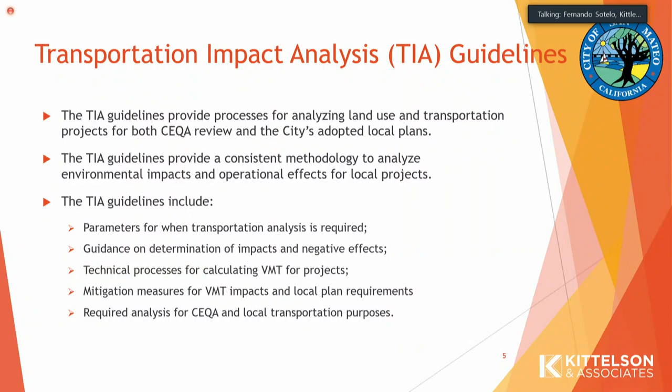Next slide please. So for the CEQA transportation analysis portion, which is based on VMT, it consists of two major topics: one is how we address land use projects, and the other is how we address transportation projects. For the land use project, that will primarily be land development, a lot of times submitted by applicants.

And we developed a couple of procedures to be able to screen out some of the projects from a detailed VMT analysis. That would pretty much streamline some of the processes for small projects and other things, which we're going to go over in the next slides.

For projects that do not screen out, then we would have to conduct the detailed analysis using the city's travel demand model. With that, we have looked at impact thresholds for the city to adopt, and we ended up going with thresholds consistent with OPR's recommendations. The city chose to adopt the county as the appropriate region for comparison, so our thresholds are compared to the county's existing average VMT per employee and per capita.

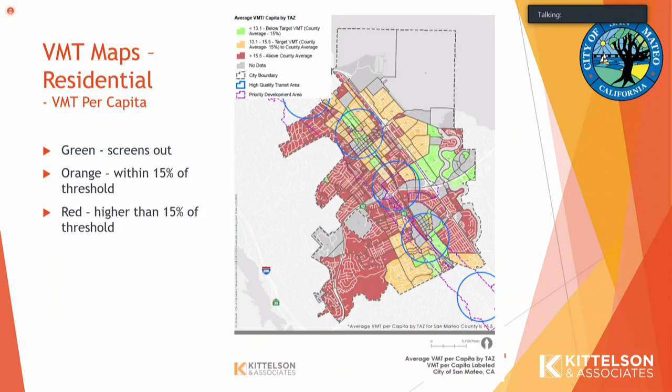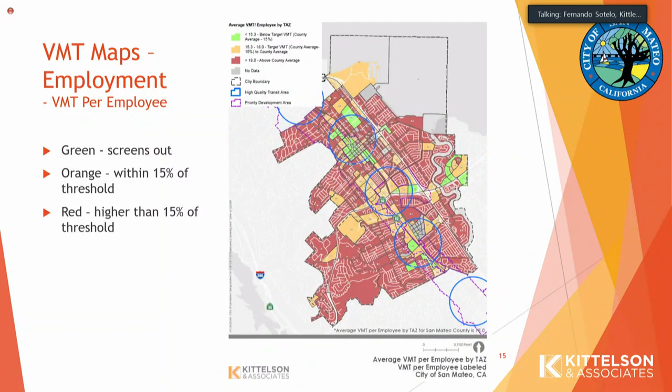But this map is going to assist the applicants and the project team to determine what type of impact may occur. Next slide, please.

Here's where the mitigation is different compared to roadway capacity. We've been using LOS and roadway capacity metrics, and primarily the mitigation has been to widen streets and intersections and other roadway improvements. But now with VMT, the focus is going to be on multimodal transportation and TDM measures. So that's where the focus is changing.

Applicants now would apply transportation demand measures for trip reduction. There's a set of tools we're currently developing for the city, looking at options implemented by the City of San Jose and the San Diego Association of Governments. There are many TDM options to consider, such as transit incentives, transit passes for employees, bicycle infrastructure, shared mobility, parking management—anything that would encourage people to use modes other than single occupancy auto.

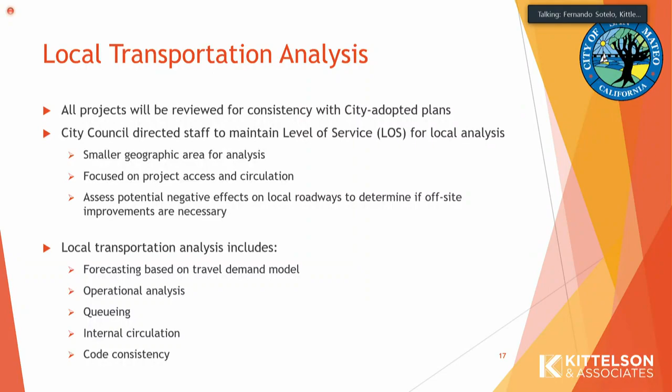That's where I take over again. Thanks, Fernando. As part of this item, we're also introducing proposed amendments to the general plan circulation element related to the introduction of the new TIA guidelines. Our current general plan circulation element is based on level of service. For example, there are two policies noted here that identify the thresholds for LOS that projects are expected to maintain, and then requirement for funding offsite improvements if there's a determination of significant impact under CEQA.

Now that CEQA is based on VMT, that means the city's ability to require those offsite improvements is limited, because findings of significant impacts using LOS is no longer possible. Significant impact is a very CEQA term. So we needed to recommend amendments to the circulation element in order to sever the tie between CEQA and LOS, and to allow the local transportation analysis to be conducted in a way that's consistent with City Council direction, and also in a way to require those offsite improvements that are necessary beyond the identified environmental impacts.

So that allows us to do the local transportation analysis and determine through that if there are negative effects on the local circulation network, and then require those offsite improvements if there are those negative effects. The proposed amendments, contained as an attachment to the staff report, outline all of the modifications that would be required to the circulation element in order to make those analyses feasible.

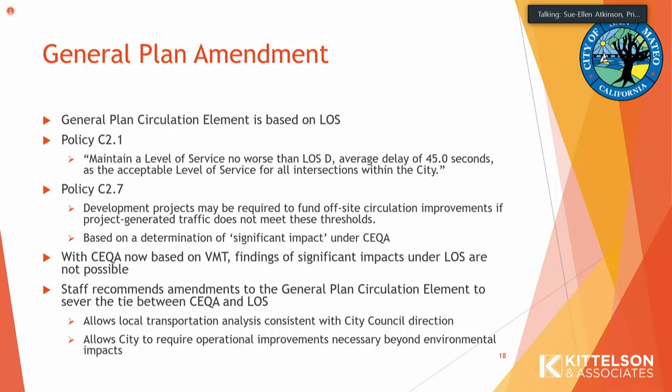So in terms of timeline, we were before you in February. Since that time, we've been doing all the research and work on developing the thresholds and screening criteria. We're here in June before you for the public hearing. After this, we plan to have a City Council study session on the same items in July, and then we're anticipating going to City Council for adoption in August of 2020.

So in closing, the staff recommendation for this item is to adopt a resolution recommending City Council adoption of the general plan amendments to the circulation element, and to make a motion to recommend City Council adoption of the proposed Transportation Impact Analysis, or TIA, guidelines. With that, Fernando, Damien, and I, and the rest of the team, are available for any questions that you might have.

Okay, thank you, Sue-Ellen and Mr. Sotelo. That was a very thorough presentation. Do any of my fellow commissioners have any questions for the staff on this presentation?

I have one question, for the chair. Understanding that we took the recommendations from the Office of Planning and Research, from the Governor's Office, on the concept of affordable housing being one of the criteria for further VMT, what was the City Council's recommendation on why we moved from it being a half mile from transit to being any place or any location throughout the city?

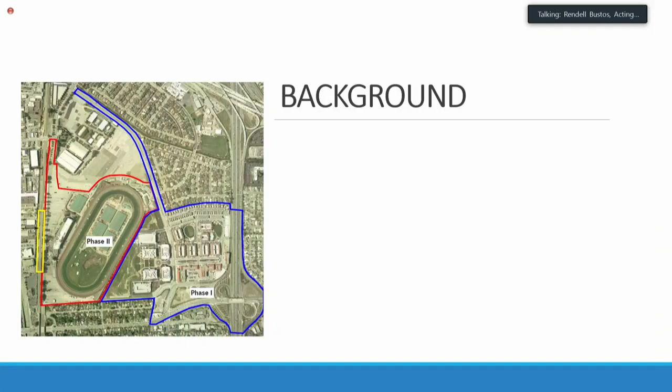I thought it'd be beneficial to start with a brief overview of Bay Meadows, since this is the first Bay Meadows item for a few of our commissioners. Bay Meadows is a two-phase redevelopment of what was once a prominent horse racetrack facility, turned into a mixed-use transit-oriented development. Bay Meadows Phase 1, outlined in blue in the graphic to the left, was approved in 1997 and is almost at full build-out, except for one vacant site at Franklin Templeton's office campus.

It consists of an office campus, apartments, single-family homes, an anchor grocery tenant (Whole Foods), a gym, open parks, and several more mixed uses. The second phase, Bay Meadows Phase 2, outlined in red, was approved in 2005, along with the development agreement, EIR, and entitlements on a block-by-block basis.

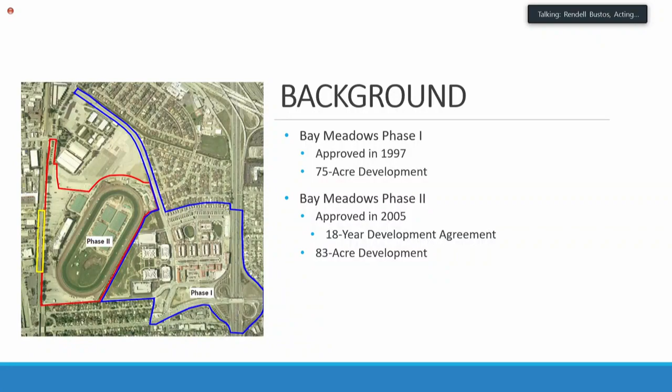Phase 2 is just west of Phase 1 and was conceived at the same time as the Rail Corridor Plan, both of which focus on locating higher density housing and office uses closer to the Caltrain station. The closest station is the Hillsdale Caltrain station, and its relocation is shown in yellow, adjacent to Phase 2 along its western side.

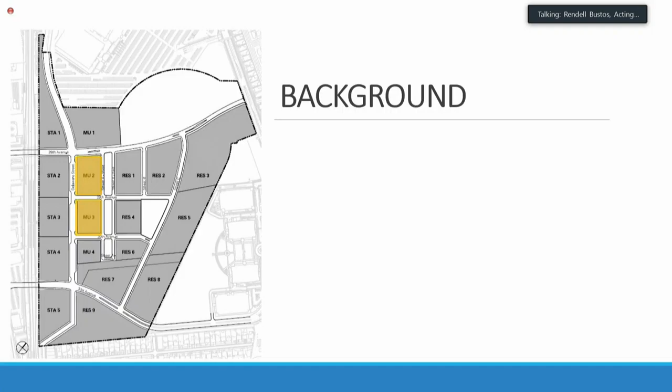This particular application focuses on the mixed-use blocks MU2 and MU3, highlighted in orange. With the approval of the phase 2 area, the council had approved this phase 2 specific plan amendment to the Bay Meadows specific plan, which is essentially a standalone document, as well as the design guidelines and development standards.

Within the specific plan amendment are a series of provisions related to land use, density, and overall goals of the phase 2 area. So this particular chart at the bottom of the screen shows the limits of commercial or office, residential, and retail land uses in the phase 2 area.

So under the base program, Wilson-Meany can develop a maximum of 1.25 million square feet of commercial or office, 1,250 residential units, and 150,000 square feet of retail.

They can flex a little bit based on market conditions, by increasing commercial and reducing the residential maximum, or vice versa. Regardless of the opted maximum, the specific plan amendment requires a minimum of 500,000 square feet of commercial and a minimum of 1,000 residential units.

Following the staff presentation, Wilson-Meany will go into where they stand currently.

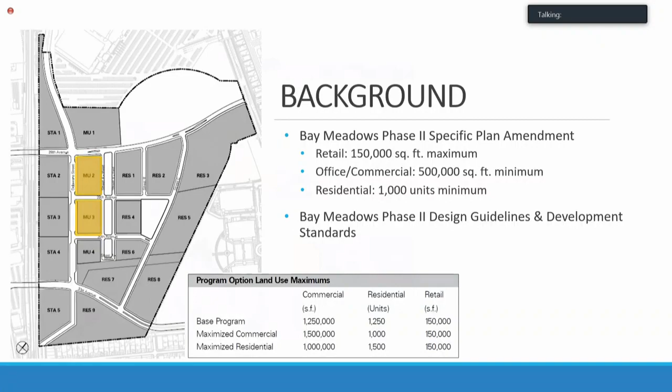So looking closer into the subject project sites, MU2 and MU3, shown in orange, are adjacent to each other, bound by South Delaware Street, Landing Avenue, West Kyne Street, East 28th Avenue, and Derby Avenue, dividing the two blocks. They're both zoned BMSP, which stands for the Bay Meadows Specific Plan, and have a general plan land use designation of TOD, Transit Oriented Development.

MU2 and MU3 are approximately 1.75 acres and 1.51 acres in size respectively. MU2 and MU3 are the final remaining vacant mixed-use blocks, situated between MU1, which is the site of the Bridge Affordable Housing Development currently under construction, and to the south, MU4, which is completed.

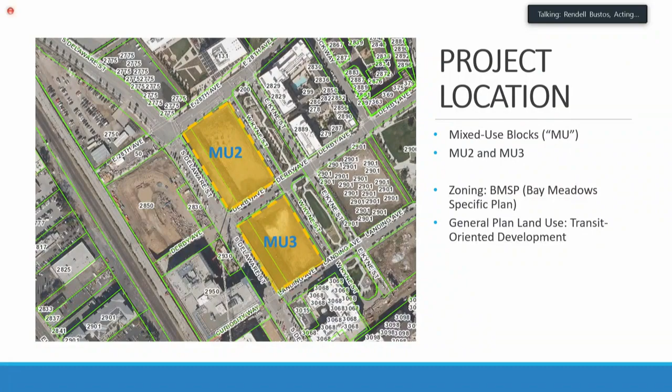So shortly after the adoption of the phase 2 specific plan amendment, Wilson-Meany received approval of all blocks in April of 2008. Due to changing architectural interests, programmatic needs, and economics, Wilson-Meany has for some blocks requested a modification of the 2008 designs on a block by block basis.

Most recently, the Planning Commission reviewed and approved the modification to the Station 1 and Station 5 blocks in 2018. And in some cases, Wilson-Meany did build the 2008 designs. But again, when needs change, they sought modifications to those 2008 designs.

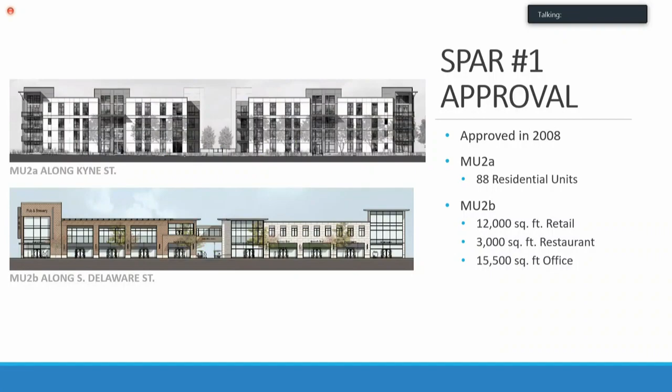So this particular slide shows the original MU2 design, with MU2A being the residential portion at the top and MU2B being the commercial portion at the bottom.

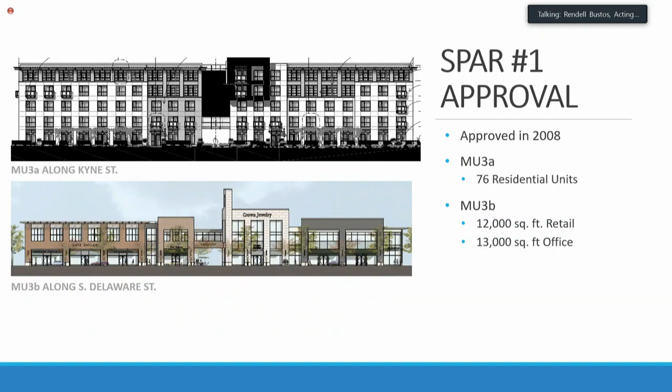And this slide shows the MU3 design approved in 2008. Similarly, MU3A at the top is the residential portion, and MU3B at the bottom is the commercial portion along South Delaware Street.

So under this particular modification, the applicant is requesting generally to increase the office square footage and to reduce the number of previously approved residential units. At MU2, the applicant is requesting a total of approximately 184,000 square feet of office uses,

7,500 square feet of retail, as well as an area with potential for a childcare facility. At MU3 to the right, the applicant is requesting 121,000 square feet of office uses and 5,100 square feet of retail.

In terms of the residential components for each, the applicant is requesting to remove the 88 residential units from MU2 that were previously approved, and to reduce the units in MU3 from 76 to 57.

Staff anticipates that the applicant will still be under the max land uses for office and retail limits, and still exceed the minimum 1,000 residential units total in the phase 2 area. Again, following staff's presentation, the applicant will provide greater detail behind the exterior design and site planning.

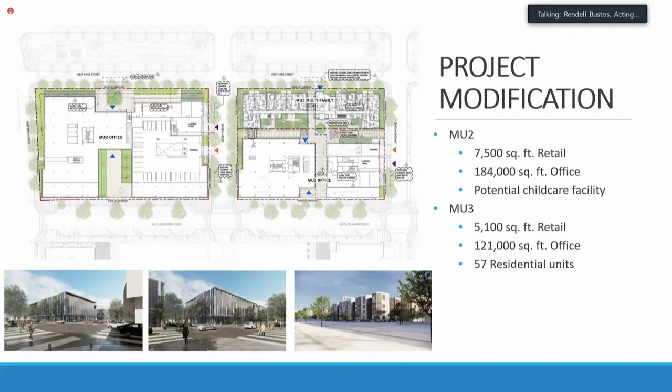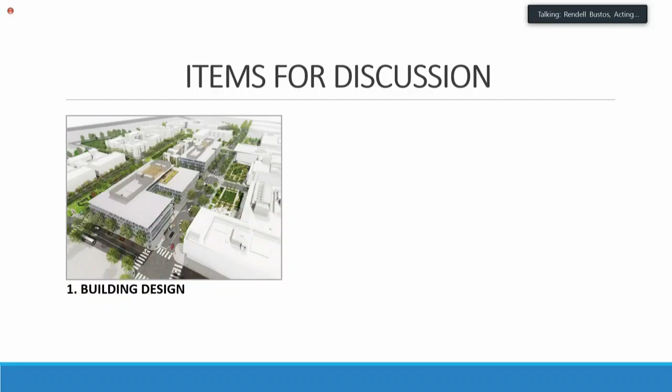So this evening, staff is requesting that the Planning Commission provide feedback to staff on two main items, both of which are design focused. The first discussion item is on the building design as a whole, in particular its massing, material selection, and compatibility in the phase 2 area.

So a bit on the proposed building materials. Generally, the architectural style is contemporary, probably much more contemporary than what we saw in the 2008 design. This design utilizes glass curtain walls, metal paneling, as well as concrete and wood-like paneling closer to the ground level.

Considering the building designs, the commission should also consider the fact that at build out, the designs were more contemporary generally than the design guidelines had originally conceived, which were a little more traditional. You could probably attribute that to the fact that building designs are informed by their context, and given the identity now of phase 2, the context had become more contemporary than originally imagined in 2008 possibly.

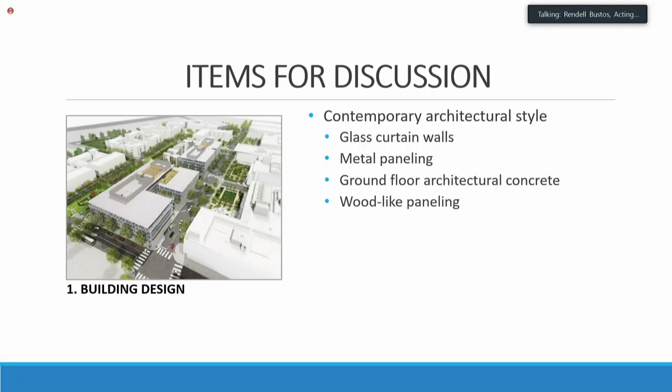So the second discussion point for the Planning Commission is on the applicant's list of requested exceptions to the phase 2 design guidelines. As mentioned previously, the council adopted the phase 2 guidelines and development standards to provide a set of standards for physical development of the various blocks. The guidelines mention that the design for each station is not required to comply with all provisions. Rather, the applicant can request exceptions and provide justifications for them, and it's on the applicant to demonstrate how the design is consistent with the guidelines and specific plan overall, even with those exceptions. Historically, all phase 2 blocks were approved with some exceptions to the guidelines, based on the fact that the guidelines were shaped prior to even knowing what the physical buildings would look like and how they'd be laid out.

The staff report included attachment 7, which is the list of exceptions in greater detail, generally relating to building location, massing, and setbacks. Staff also included attachment 6 to provide the commission with the list of design exceptions approved for the 2008 designs.

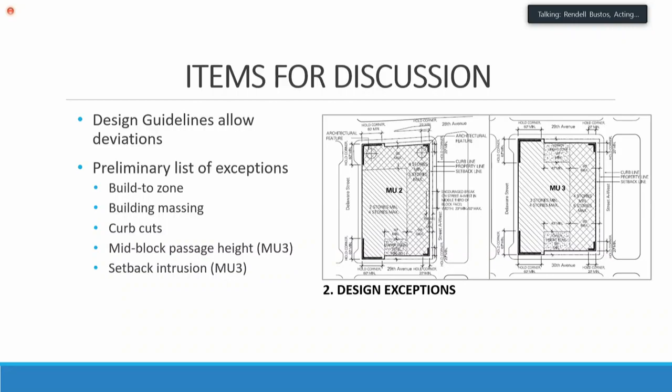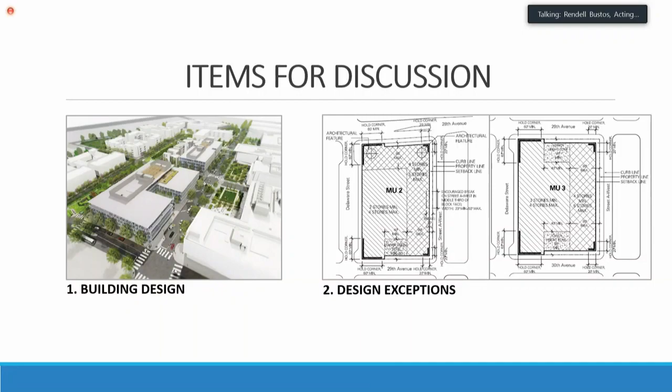So again, to recap briefly, staff is requesting feedback on the building design as a whole, as well as whether the design exceptions result in an overall improvement of the design.

Lastly, on the next steps, because this item is pre-application, the applicant will have the opportunity to revise the design based on feedback from the commission and the public prior to filing their SPAR modification. Staff will review that modification and conduct environmental review prior to a public hearing by the Planning Commission for action on the application.

This concludes staff's presentation. I, as well as Lisa Costa-Sanders, who's co-planner on the project, are available for questions. We also have city staff and public works for questions, and the applicant, Wilson Meany, and their design team will also be providing presentations. Thank you.

Okay, excellent. Thank you. Can we go ahead and have the applicant presentation, and then we'll go to the commissioner questions.

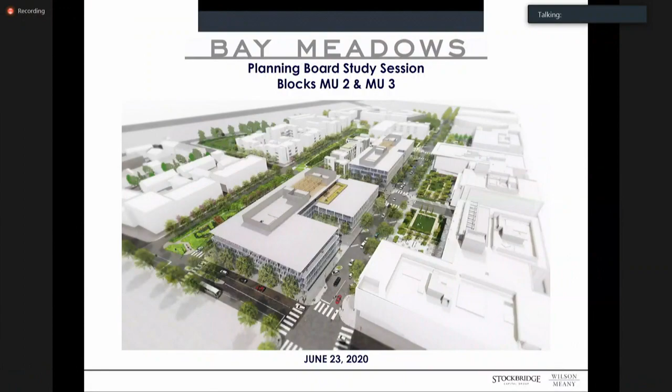Good evening, commissioners. My name is Janice Thatcher. I'm with Wilson Meany, developers of Bay Meadows. We're here tonight to propose a SPAR modification for mixed-use blocks 2 and 3, as Rendell said.

To give you a brief overview of Bay Meadows today, the project is approximately 2/3 complete. We have 777 homes with 1,800 residents, 3 office buildings which are fully leased to high-quality tenants, and retail stores including Fieldworks Brewery, Roam, Blue Bottle, Lift Fitness, and Tin Pot Creamery.

The transit-oriented development is working. According to our surveys, over 40% of the residents commute via Caltrain. The Station 4 garage is roughly 2/3 full, as over half of the SurveyMonkey employees and their subtenants take alternative modes of transportation. The project is compliant with traffic requirements, including the Traffic and Parking Management Plan, as well as the TMA's annual parking study. We currently have several buildings under construction or about to start, including over 200 homes and 2 office buildings at stations 1 and 5.

The proposed SPAR for MU2 and 3 is consistent with all project approvals, including the development agreement, specific plan amendment, design guidelines, and traffic controls. As a reminder, pursuant to the development agreement, Bay Meadows has made significant contributions to the city, including 15 acres of public parks, land for the bridge housing development, and over $12 million in impact fees. The SPAR process is required to ensure consistency with the design guidelines and development controls.

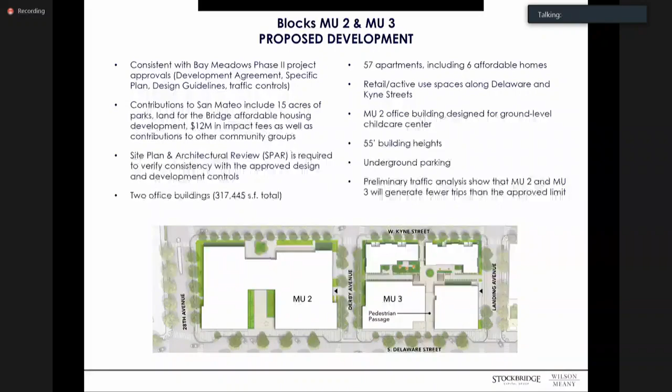We have completed a preliminary traffic analysis, which indicates that the project is consistent with the trip budgets established for the project. In summary, at completion with the proposed SPAR amendment, we would have 1,038 homes, within the limit of 1,000 to 1,500 approved for phase 2. And we would have 1.2 million square feet of office space, again within the range of 1 million to 1.5 million approved previously.

I would now like to introduce Nicole Emmons of Hart-Howerton, who is going to provide some additional context. Thank you, Janice, and thank you to the chair and the commissioners. As Janice noted, I'm Nicole Emmons, a principal at Hart-Howerton, along with my colleague Paul Milana, who you will be hearing from shortly. We've been working with the city, with Wilson Meany, and a team of architects and landscape architects at Bay Meadows since 2000, on the specific plan amendment, design guidelines, architectural design, as well as working with the city as it's been built out over time.

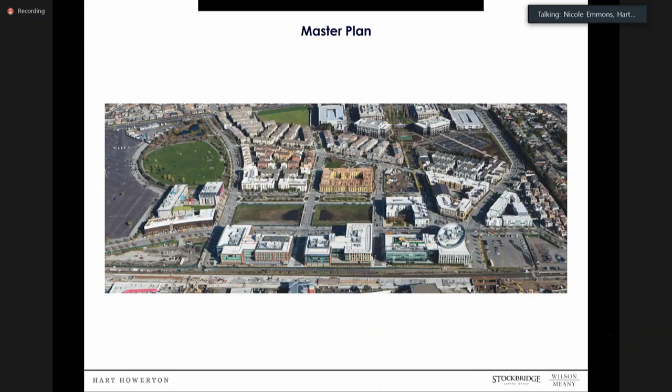The Bay Meadows Master Plan is designed to integrate a transit-oriented development into the fabric of San Mateo, providing open space and 15 acres of parks to serve the community, and sets forth a vision to create a community setting that would first and foremost consider the public, the pedestrian, provide for the needs of the community with a mix of uses within a walkable neighborhood, clustered development with higher density uses conveniently accessible to transit, and create alternate ways to move through and experience the community, be it on bike or on foot.

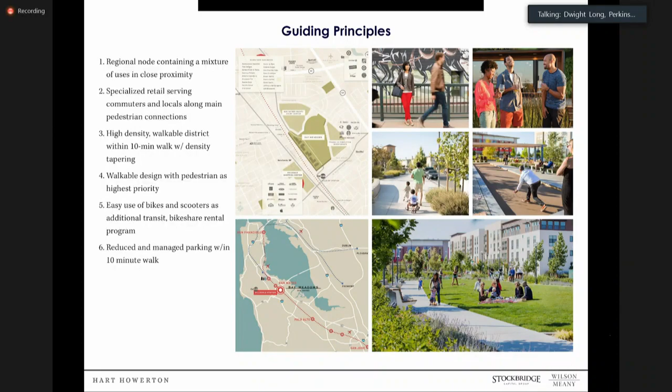There are a number of approvals in place that set the design standards and guidelines to ensure the development meets the objectives of the specific plan. These are the criteria for evaluation of designs that conform to a commonly held vision and set of expectations, with particular attention to those aspects of design seen and experienced by the public. We commonly refer to that as the public realm.

Components of these guidelines, such as those noted here, direct and instruct the developer, designers, and architects with regard to how a building should be designed within the context of a larger community, so that all buildings recognize and contribute to a larger pattern and a sense of place, becoming part of the daily life as the backdrop for where life happens at Bay Meadows.

Dwight Long from Perkins & Will will now walk through the design of the office components.

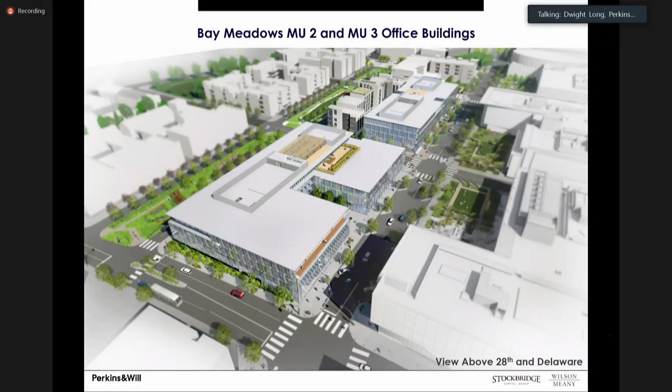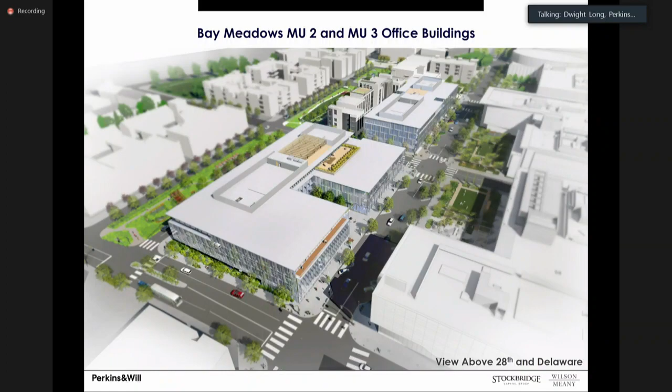This is an aerial view looking southeast from the prominent corner of Delaware and 28th. You can see both the MU2 and MU3 properties in relationship to the station blocks across the street.

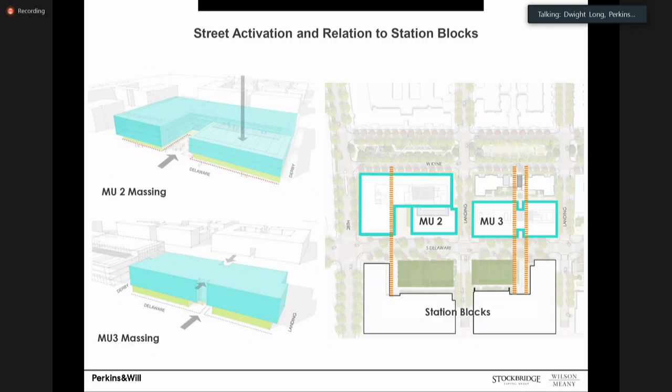The left-hand images show the building's massing organization. Both buildings consistently use a base, middle, and top composition, where the base and top are generally set back to help break down the overall scale of the building. The continuous setback ground level street activation is highlighted in yellow.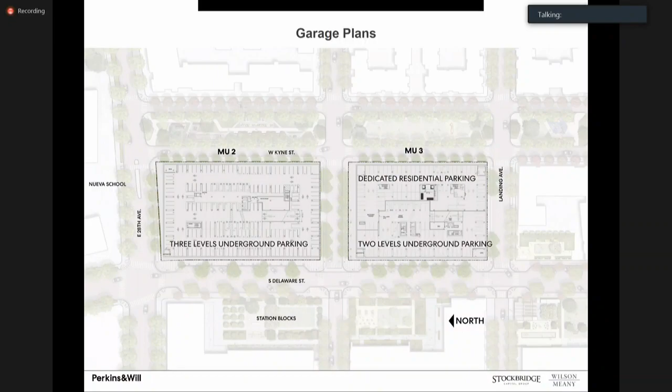I'm going to now show some exterior views of the building to describe the architectural approach for the office buildings. We start with a view looking from the prominent corner of Delaware and 28th Avenue. In general, the buildings share a similar massing, material, and facade patterning approach.

We've used a lighter, more transparent material vocabulary in contrast to the more solid station blocks to serve as a bridge between the station blocks and the residential neighborhood to the east.

In terms of massing, as I said before, the top and base of the buildings generally set back to reduce the perceived mass of the building, shown here at the ground floor retail active use on the street and the 4th floor terrace to provide social spaces along Delaware.

The facades range from a clean glass facade here at the corner of Delaware to an introduction of refined vertical metal panel accents that provide a rhythm to the facade as one moves around the building. This is shown here on 28th, where the panels help to break down the scale of the facade as one moves towards the park.

Lastly, the building forms are consistently framed and highlighted by broad roof eaves clad in natural wood to create a soft, warm surround of the glazed facades.

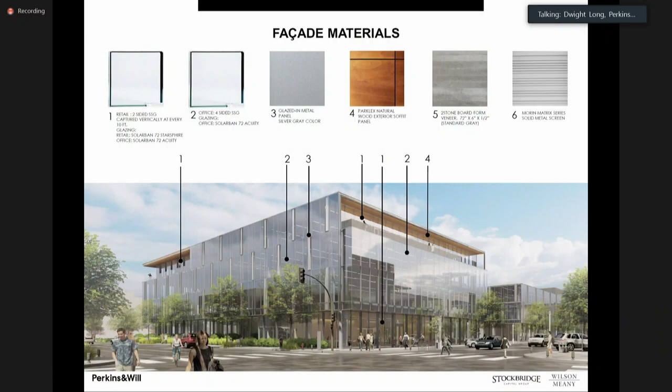When we set out to design the residential building, our inspiration came from the iconic row houses that are ubiquitous across the Bay Area, often featuring a prominent projecting bay window with their vertical rhythms that create so many cherished streetscapes throughout the region.

As Dwight mentioned, there are 68 parking spaces located below grade. Access is shared with the office building along Landing Avenue to minimize curb cuts, but the residential parking is gated. Direct access to the residential floors is provided via elevators and stairs, and there is additional bike parking and a pet washing station located at this level.

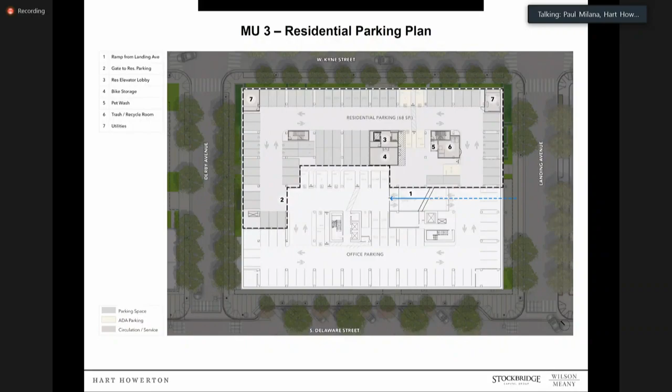In the lobby entry, the bay window composition and roof shade structure at the center of the building form an architectural feature marking the entrance to the mid-block passage.

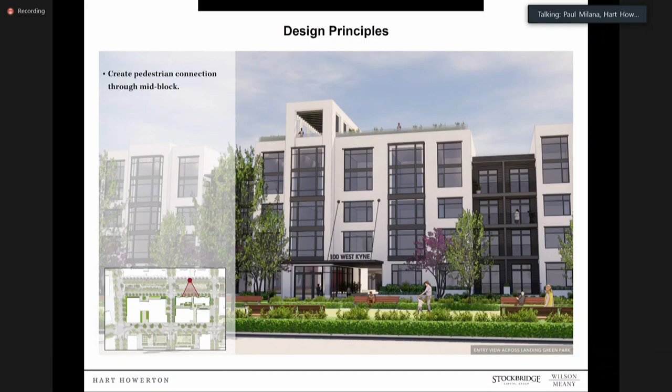Looking at some of the design features of the building, we see the mid-block passage shaded by a broad overhanging canopy with the building identification overhead, as well as the composition of the lobby glazing, the bay windows, and the shade structure at the roof as an architectural feature.

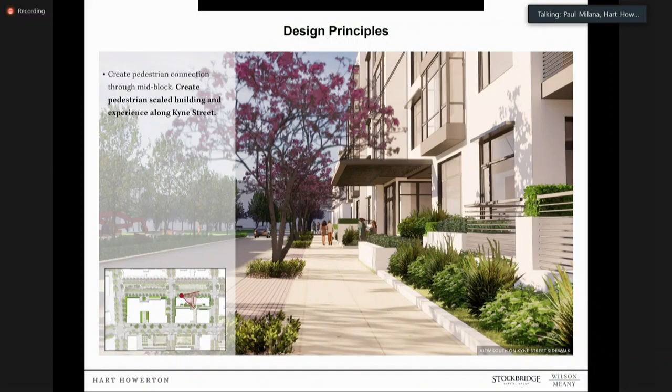Along Kyne Street, the broad canopy clearly marks the entrance to the building in the mid-block passage, and the layered landscape terraces and projecting bay windows help to give human scale to the building at street level.

There are many housing options at Bay Meadows today. With this building, a new type of residential unit will be offered. The 4th floor units have additional ceiling height with loft space, some as sleeping lofts and others as bonus rooms.

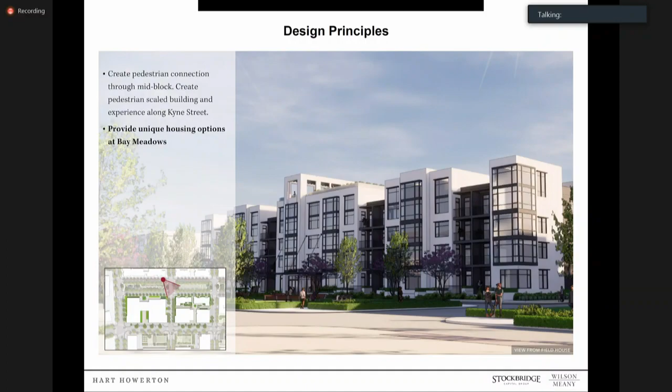This view shows how the architecture of the residential building evokes a time-honored housing type in the Bay Area, while clearly being a contemporary building that complements the range of architectural expressions currently existing at Bay Meadows and along Landing Green Park.

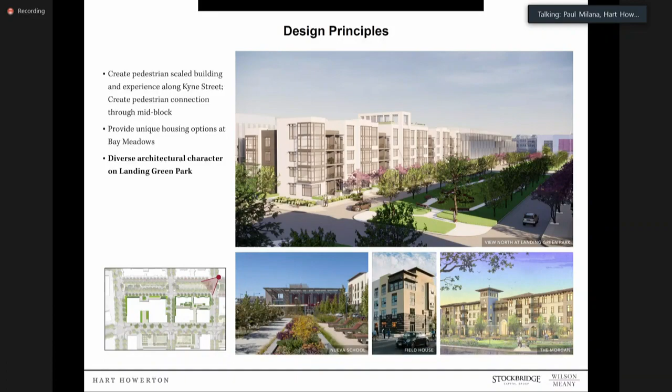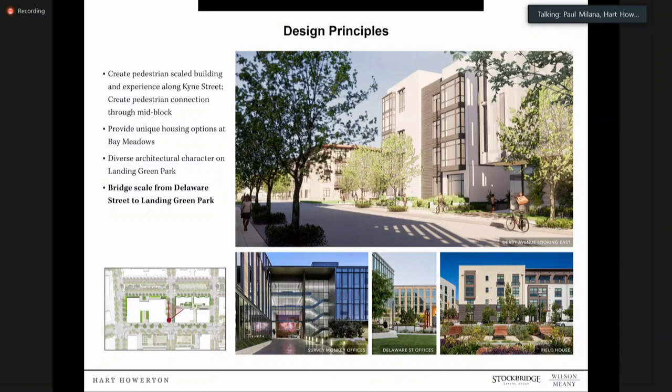This view along Derby Avenue illustrates how the building bridges the scale of the office buildings along Delaware with a break for the north-south walkway, and then the massing builds up again to Landing Green with the use of the loft unit.

As for the exterior materials, the primary wall material is an off-white stucco. It is accented with dark gray lap siding at the terraces. Window frames are dark with clear glass. There are a range of dark gray metal elements for the terrace structure, a gray stained porch ceiling, and glass handrail at the roof deck to maximize views.

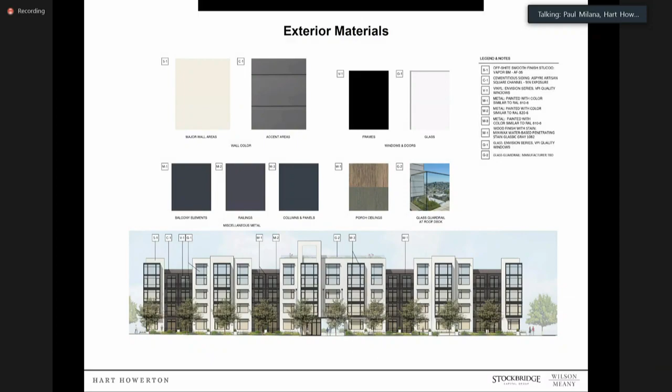Now I'd like to introduce Nico Wright with CMG Landscape Architecture. Thank you, Paul. Good evening, commissioners. My name is Nico Wright with CMG Landscape Architecture. CMG has been involved with the planning, design, and construction of the Bay Meadows community from the beginning of its development.

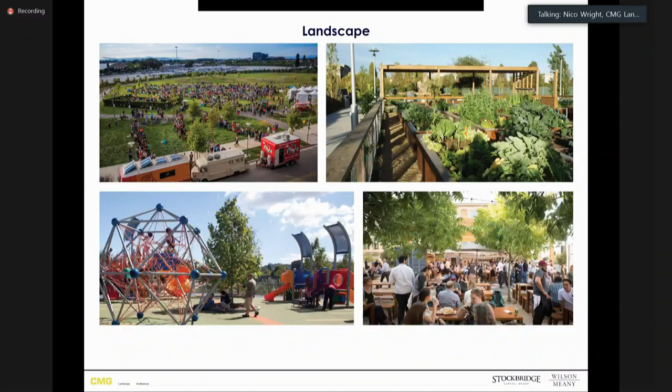When we embarked on the planning for Bay Meadows, we conceived of the streets and open spaces as a continuous network of parks that would be a great place to walk, bike, stroll, and gather in. That has led us to the creation of a variety of public spaces, from beautiful pedestrian paths and sidewalks to the community garden, playground, large park, and beer garden you see here.

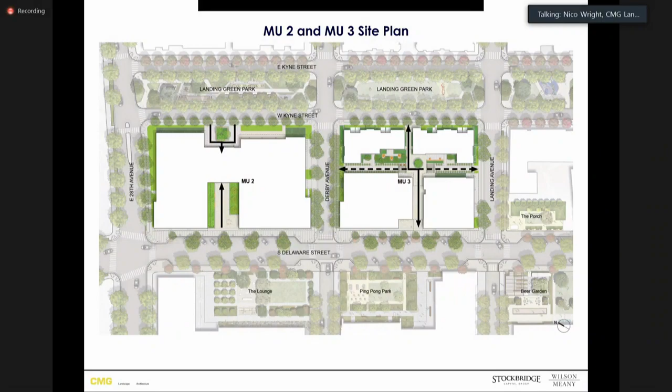At the MU2 and 3 sites, we are integrating the office and residential buildings into the sidewalks, connecting the buildings to the walkable landscapes that connect the neighborhood. Generous entry plazas lead into the office building in MU2, and pedestrian passageways with rich planting connect the MU3 block to the sidewalks and park around it.

Our approach to the planting is to continue the principles of embedding ecology, habitat, and water conservation throughout the landscape of the neighborhood, and provide delight for people through rich garden spaces full of flowering trees to textured planting. The planting palette is selected for its drought tolerance, low maintenance, and benefit to ecological and habitat value.

At the MU2 office building, a social plaza, shown on the left, invites people into the building off of Delaware Street and offers a place to pause and people watch out onto the activities on the social street under the shade of a stand of sweet gum trees.

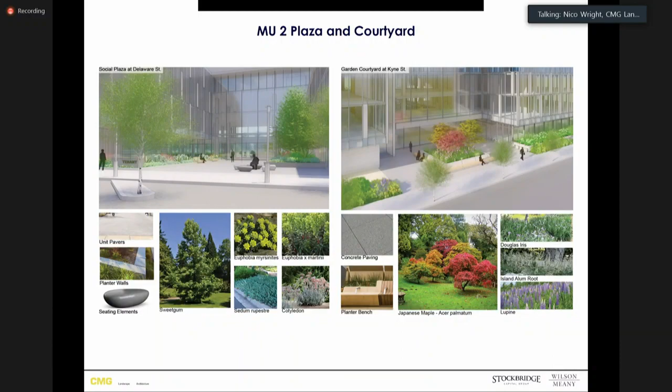On the right shows the garden courtyard along Kyne Street that provides a place of respite with bike parking adjacent to the building lobby. The garden courtyard will be a wonderful place for office workers to take their lunch around a grove of maple trees.

At the MU3 office and residential building, the pedestrian passage will lead through the buildings, connecting it to amenities on Delaware Street and Landing Green Park on Kyne Street. Residents entering from Kyne will be able to pass straight through the passageway with their bicycles to access the secure bike parking off of the courtyard.

Where the pathways join, there's a garden of flowering trees, shade trellises, and bicycle parking as shown on the left. There are small social spaces for meeting within this courtyard around a flowering dogwood tree. We are thrilled to bring these buildings and their landscapes to complete the neighborhood of Bay Meadows.

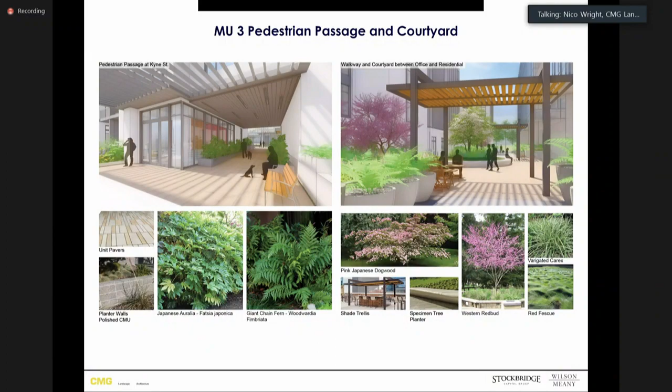Yes, it is. Thank you for your time. Okay, thank you.

Before we go to public comment, we'll go to questions from the commissioners. Who would like to start? Questions for staff or the applicant? I could start. Okay, Commissioner Williams.

Okay, thank you. That was a lot to take in, so hopefully my notes and questions won't be too disjointed. First, there was reference in the staff report or presentation to land put aside associated with the bridge project, and I don't recall what that is or where that is. Could you provide me more information about that?

Sure. The bridge affordable housing site is also known as MU1, which is just north of the MU2 site. If I could pull up a map briefly. Is that the project that's next to Nueva? Yes. For, yeah, going to pull it up. Right, okay, and I think that's in construction right now. Yes. Okay, thanks, that's good to know.

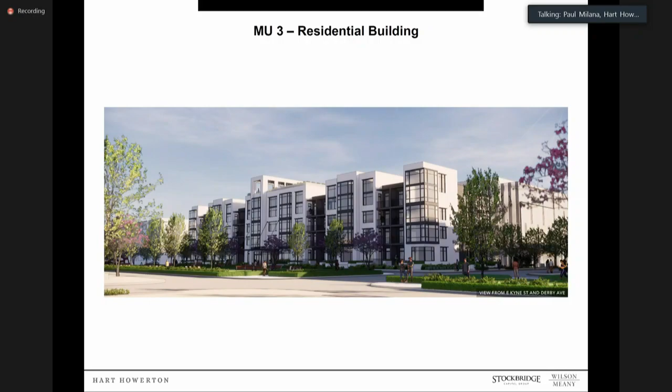Sure, this is Paul Milana with Hart Howerton. We studied many configurations for the massing along Landing Green, and we really liked the ability to link the glazing of the lobby area, the bay window element on the next three floors, and a shade structure on top of that composition to become an architectural feature that marks from some distance the passage and entry to the building. Then to balance that, we added the canopy with the cable support, so that it's an asymmetrical composition, but we think the asymmetry in this case is balanced, if that makes sense.

There was another image of it that showed - yeah, right there. Okay, I just wanted to hear your thoughts on that.

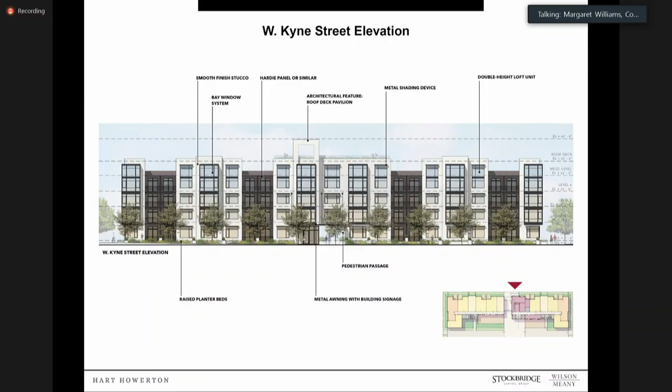Okay, I have one last question for clarification. Looking at the floor plans, the loft spaces or bonus rooms, I was just curious - did those have closets? I couldn't tell from the plans easily. I don't know if it was in this presentation, it was in the packet I got. I don't think it showed here either, but is there any reason why they wouldn't have closets? I believe they have closets, but Nicole, please correct me if I'm wrong. Any of the lofts that are sleeping units, sleeping lofts, have closets. Okay.

I think that's all the questions I have. Let me just double check. Yeah, that's all that I have. Okay, thank you, Commissioner Williams.

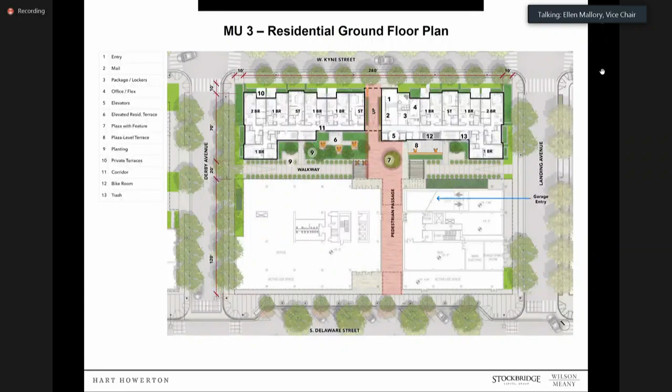Questions, clarifying questions for staff or applicant? Yes, Commissioner Vice Chair Mallory. My question is for Ms. Thatcher - I would like to hear your thought process for making these changes and your reasoning behind it.

One of the underpinnings of the entitlements for Bay Meadows was to provide flexibility for long-term development of these blocks, specifically as either residential or office. Based on the market today and the mixed use nature of the development, we think office is supportive of the other uses, predominantly the public transit and retail that's so important to the community at Bay Meadows. The additional 317,000 square feet of office space brings a lot of workers to the area, which helps support the commercial uses. That's really our thinking behind it.

And when did you start this thought process? It had to have been a while back.

It's been something we've been studying over the last year or so, working with the design team. As you noted on the previous SPAR, we had two separate buildings: a residential building lined on the east side of the block across from the Landing Green Park, and small 2-story buildings on the east side of the street with retail and commercial on the second floor. That was originally designed back in 2008, because prior to the commencement of the grade separations, the project had a much lower trip budget, so we were not able to build out all of the space. On the west side of the street there were also bar buildings. Now, as the grade separations are nearing completion, we have a higher trip budget, and the ability to build a building which fills that whole block and has active retail use on the ground floor, we think is a better design and more supportive of the mixed use development.

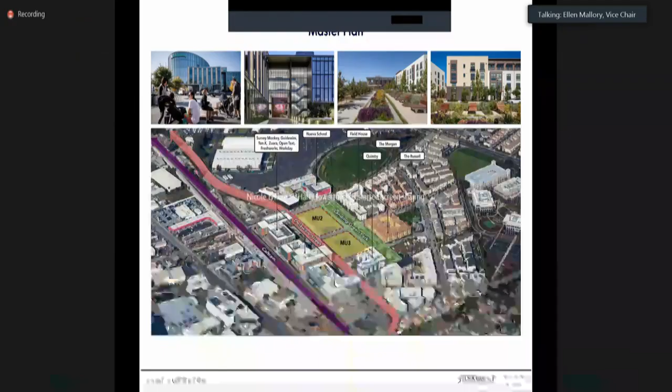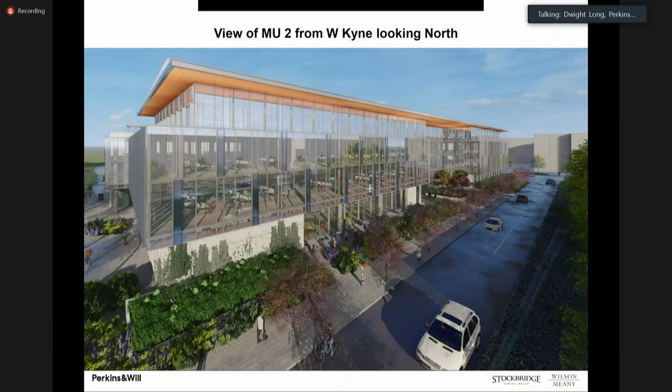What we've tried to do is give that side of the building a much more broken facade, layering this roof overhang to give it a more residential feel. This facade steps back along its entire length, with a large eave hanging over the building. We used more tactile materials on that side, and set the building back from the Kyne Street edge. So there's much more breakdown of the overall facade in terms of how the height is perceived, as well as opening up where the entry on the backside of the lobby would be. In addition, the outdoor play space for the potential childcare is right there, helping create an active use along Kyne Street. So we think it's a much more residential feel on this side of the building than the front, which faces more directly to the street. Does that help?

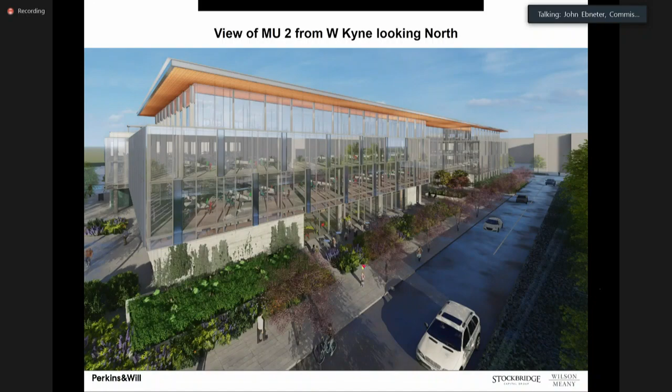Janice - have there been other locations within Bay Meadows Phase 2 where childcare has been proposed as part of the build out? We are super excited about doing childcare at Bay Meadows, and we've been approached in the past by childcare providers. One challenge we've had is that we haven't had a location with the required outdoor space, so that's been our limitation. With this location, we do have the code-required outdoor play space along with the interior space.

Okay, I'll get back to that during the comment period, or maybe some more questions. The residential component was originally, I think, 164 units for sale, and now there are 57 units for rent. What's driven you to such a drastic swing in residential, and why are they now only rental?

As explained previously, we have the ability to pivot between commercial and residential on these mixed-use blocks. In addition, the underlying entitlements don't dictate whether the housing is for sale or for rent. In both cases, these are market-driven decisions. For rent, we now have a number of for-rent buildings at Bay Meadows - we have the Morgan, currently under construction and completed later this fall, and the buildings known as Russell, Quimby, and Fieldhouse, which are rental buildings.

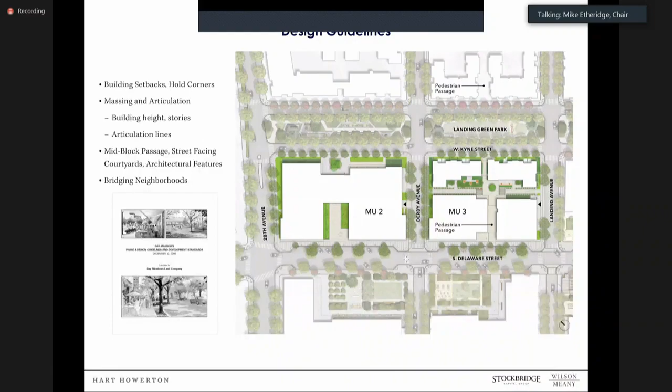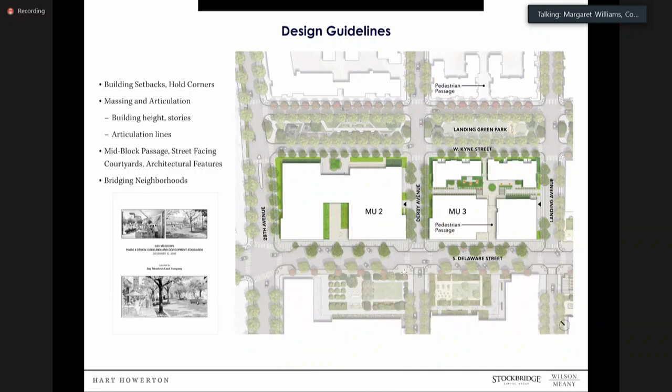The courtyard feels rather deep and not wide - deeper than it is wide. I wonder if that would feel a little more inviting. As I said, I walked down the street today looking at it, and the station buildings on the other side of the street are much wider than they are deep in terms of open space, and they're extremely inviting.

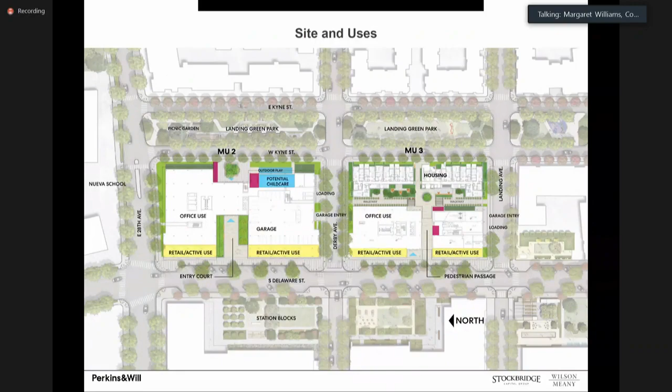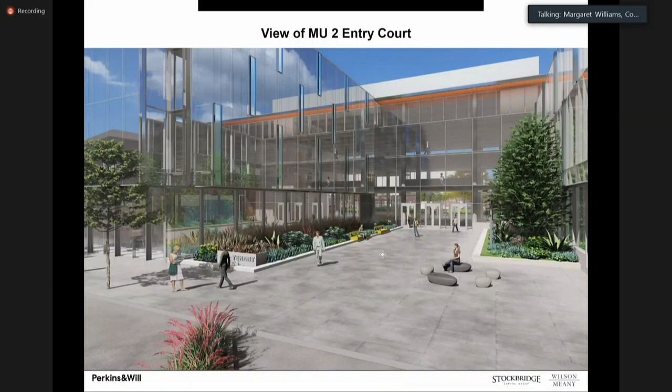The courtyard for MU2, the sort of slot - architecturally it's kind of interesting, but in terms of the pedestrian experience, it feels a little stark, deep and narrow. I know it's not that narrow, but it feels that way compared to what's across the street. So I don't know if there's any way to open that up a bit.

Let's see, I think those were generally my comments with regards to massing and materials. With regards to the design exceptions, I realized there were pages of them, but they were all related to other buildings. So just looking at the items associated with MU2 and MU3, I think they generally make sense and are acceptable with a couple of comments.

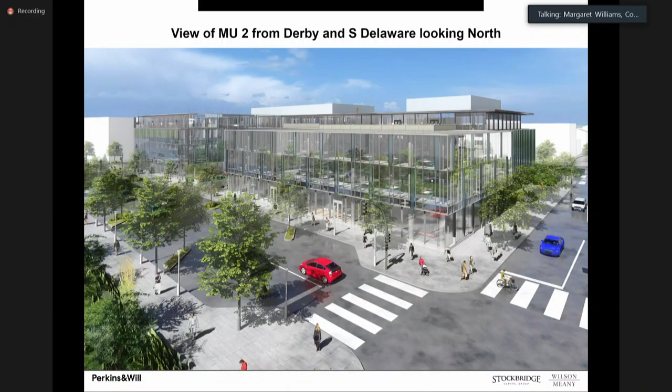28th Avenue is the one that goes by Nueva School, right? So the build-to-zone and holding the corners along there - I feel like it actually makes sense to pull that back a little bit. This creates a pretty urban setting for a high school that hasn't had that feel until these buildings are built. So softening up that elevation a little bit, not just for the residents but the students across the street, might help. So pulling it back a little bit at some portion, not necessarily the build-to-zone.

So the two groups of people across the street from MU2 are a high school that no longer has all the open space it used to have, and residential affordable housing that's also going to be a prominent feature. So I would consider looking at that elevation in a little more detail.

Let's see, otherwise I think most everything else made sense. Oh, I did have a question. The required 3-block pedestrian easement is covered by 2 pedestrian bridges. Do we still have pedestrian bridges on MU3? I guess we do, yes. Okay, I'm just realizing that's because the walkthrough - I guess the building goes over it. So that makes sense.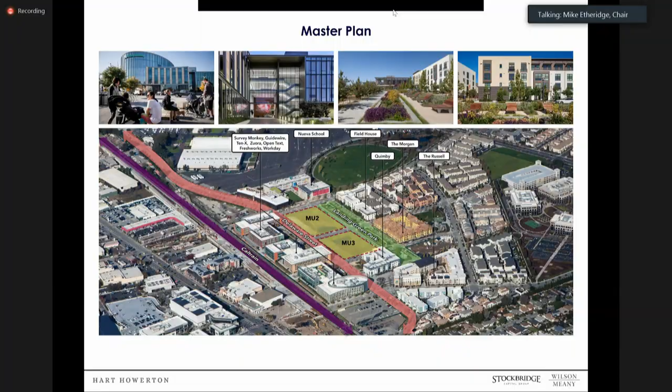Okay, thank you, Randall. So we will close item number 3, the public hearing, and we will go to new business, item 4, which is the election of officers.

Did you want to say anything, Aaron, before we go to the nominations? No, I think you go forward. Obviously this is the first time we're doing nominations in a virtual format, so it's a little bit different than normal, but the procedure itself is the same as it has been in the past and is outlined in the staff report.

Do we have any commissioners to put forth a nomination for chair? Through the chair, through the chair. We'll go John first. I would like to nominate Ellen Mallory for chair of the Planning Commission. I second that nomination. Ellen, do you accept that nomination? I will tell you that I have so much respect for my fellow commissioners and this staff, and I would do it with pleasure. All right, excellent.

Let's have a roll call vote for the nomination of Ellen Mallory as chair. Commission Chair Etheridge? Yes. Vice Chair Mallory? I'll abstain. Commissioner Ebnetter? Yes. Commissioner Maldonado? Yes. Commissioner Williams? Yes. Okay, excellent. So Ellen is the new chair on a 4-0 vote with 1 abstention.